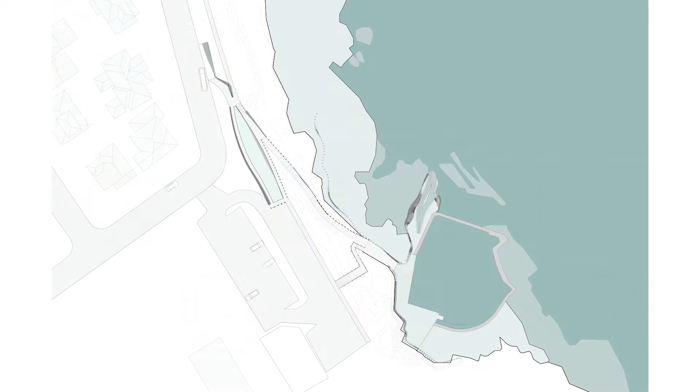To make these ocean pool experiences more accessible to the visually impaired, we empower the user from their arrival at the site by providing them with knowledge about the topography. Through a synthesis of experiences, coastal geomorphology, and history, we aim to provide universally accessible means of enjoying the ocean pool environment. Visitors to Malabar Ocean Pool will typically arrive by bus or with assistance by car.

Arrival areas are designed in universally accessible means to impart knowledge of the overall site conditions to assist in navigation. This is achieved through spatial maps which describe the site in a tactile manner. Designated experience zones are also demarcated on the spatial maps to allow the user to choose their own experience. These provide the user with ocean pool experiences with a varying degree of curation and environmental control.

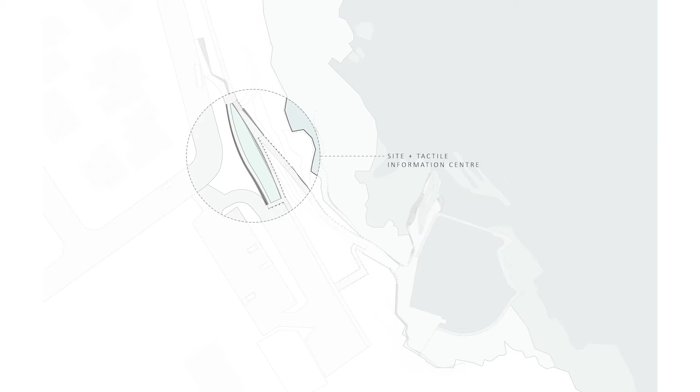For an in-depth understanding of the site, a tactile information center is recessed into the landscape, which provides a series of tactile data about the site. From a user perspective, tactile plates can begin to describe specific rock formations and reveal information of the tactile experiences through simulated examples of what can be expected at a particular site.

As the user begins the journey down to the ocean pools, opportunities are made to pause and observe the surrounding landscape. Spatial maps provide clues about the immersive sensory surroundings, including where to listen for the waves and where breaks in vegetation provide a refreshing ocean breeze.

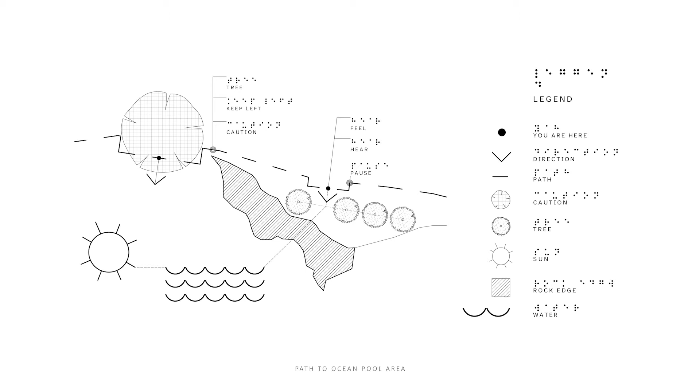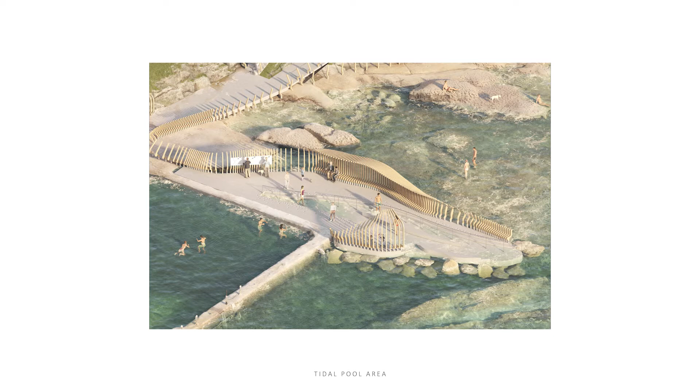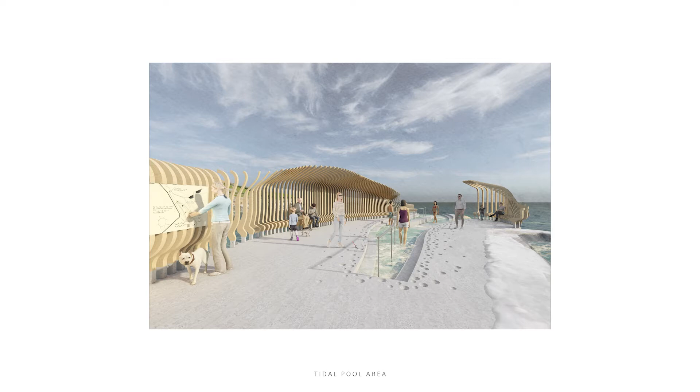To provide a universally accessible ocean pool experience, the Lost Plateau has been reclaimed to provide a curated experiential procession. The Lost Plateau enables safe testing grounds for experiencing the ocean pool environment and is embedded with layers of natural geology, including the erosion pattern language, which describes feelings of anticipation and danger underfoot. The plateau also provides a real water underfoot experience where users can interact with the ocean, tidal changes, and the marine ecosystem, a typically inaccessible environment.

Specially designed tactile maps are integrated with a wayfinding strategy to provide localized navigational information at each experience zone. Localized information is important for the visually impaired as it allows such knowledge to be front of mind.

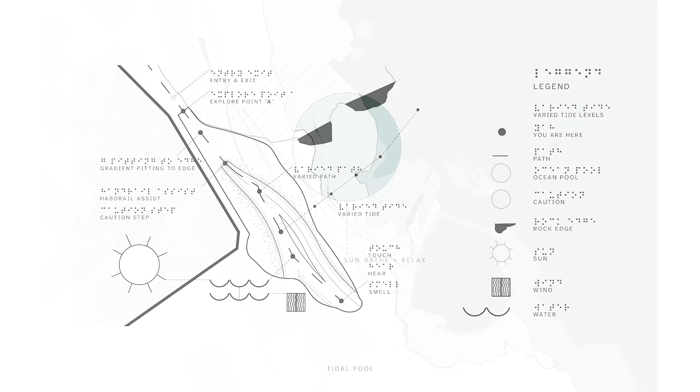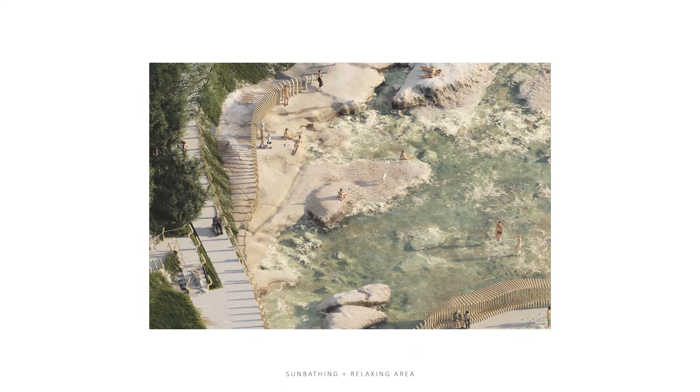One of the most common experiences at Malabar is simply to relax and sunbathe on the rock plateau. To enable users to enjoy this experience, a safe and curated path is provided along this rock plateau, where people often traverse to relax and sunbathe. The erosion patterns learned through experience at the Lost Plateau provide a sense of cognition of ocean pool formations.

Provided the user has developed a level of confidence, they may choose to adventure away from the curated path to explore. An understanding of the pattern language provided, alongside the use of other senses such as sound, will allow users to be guided back towards a sense of security of the cliff face where the provided path lays. Spatial maps here provide additional layers of information such as tide levels to assist the vision impaired with safe areas of traverse and clues about the time of day.

A key focal point and the most commonly used area on site is the ocean pool. Adjacent to the pool, an exploration area provides an opportunity to utilize the experiences gained at the Lost Plateau and traverse the natural rock surfaces. This area is naturally protected from the crashing ocean waves and provides a tranquil area of exploration and interaction with the water and ocean pool ecosystem. The spatial map indicates access to an ocean swim by providing information on reaching the pool as well as a curated journey through the exploration area beyond.

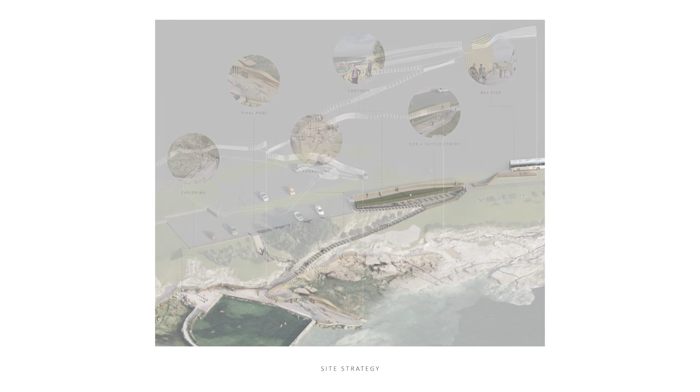So how do the users arrive at each of these experience locations? To arrive at each of these experience points, a family of hybrid timber profiles have been developed into a network of wayfinding devices to enable navigation across the site. Each family of profiles provides a certain degree of information to the vision impaired to aid in navigation. The network of profiles has been formulated as a ternary system of parts that easily allow the adaptation of the morphing profiles into a three-stage construction sequence.

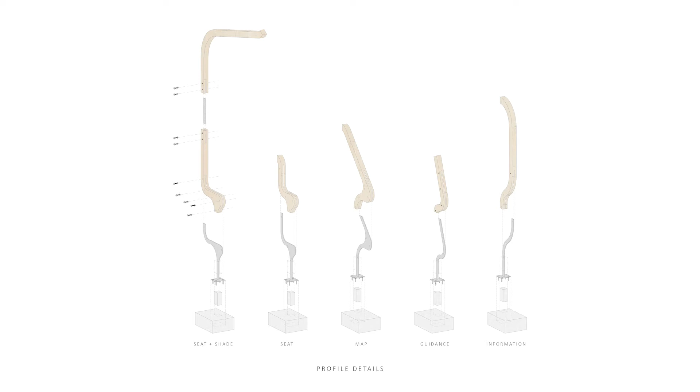These profiles have been formulated from a suite of 5 primary shapes which were designed with a human-centric approach and a particular focus on how the visually impaired will interact with the profiles. The plinth and profile base are concrete for weather protection and are uniform across the site, while the connection plate has been struck at a datum line for continuity. The timber profiles are then bolted on to form a relative response to the unique morphology and experience zone.

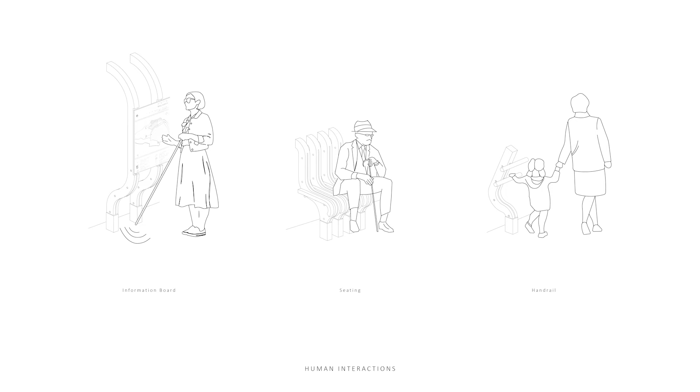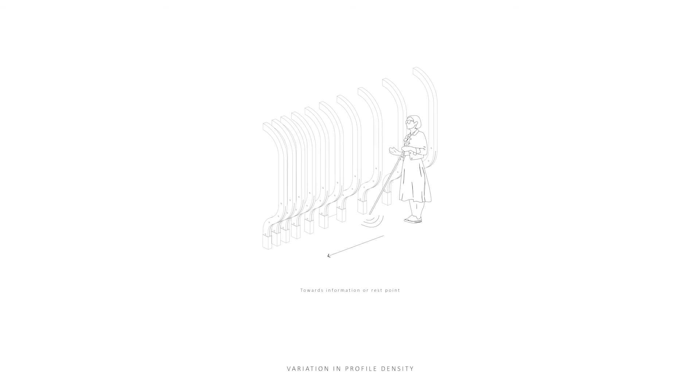Small additions to these profiles have been carefully constructed at certain points along the way to align these profiles with the uses that they are intended for. These details become the connection between the profiles and the users. Visually impaired users are also able to interact with the base of the profiles with their cane for audible, rhythmic feedback about their location and proximity to navigational tools.

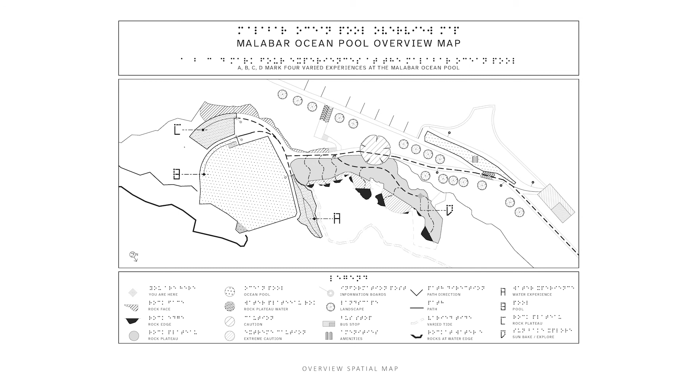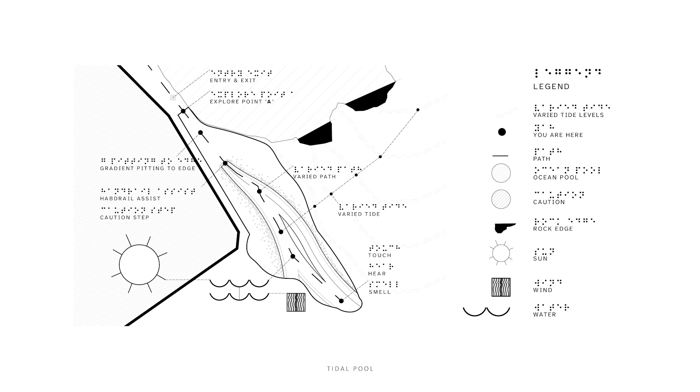The tactile maps are integrated into the family of profiles to provide specific information within a logical sequence. Firstly, the overview map placed at key points of entry provides a general outline and directional knowledge of places and experiences ahead. The localized spatial maps along the way provide more detailed experiential accounts of what to expect and provide information on immediate decisions to make. They have been formulated to inform experiences through the senses in a safe way and curated to be sight sensitive for the low vision and blind.

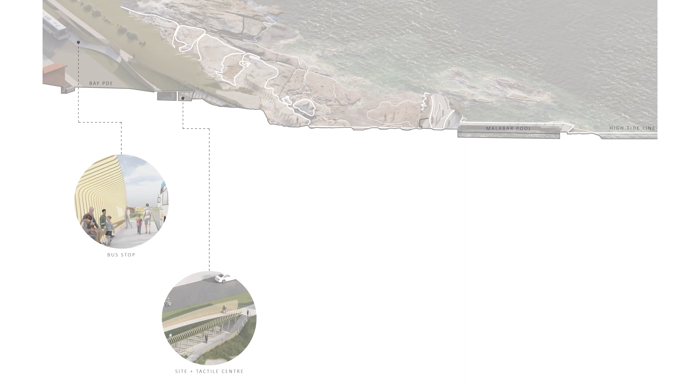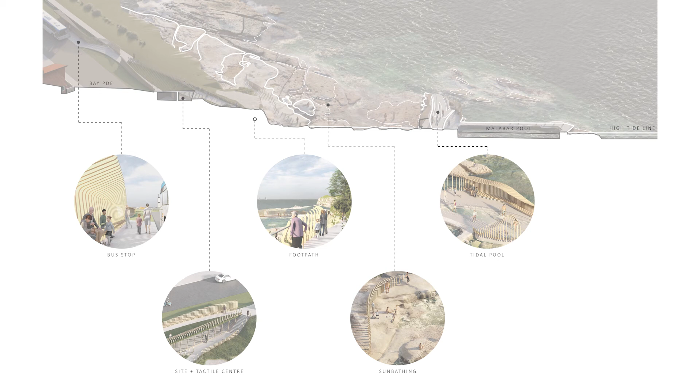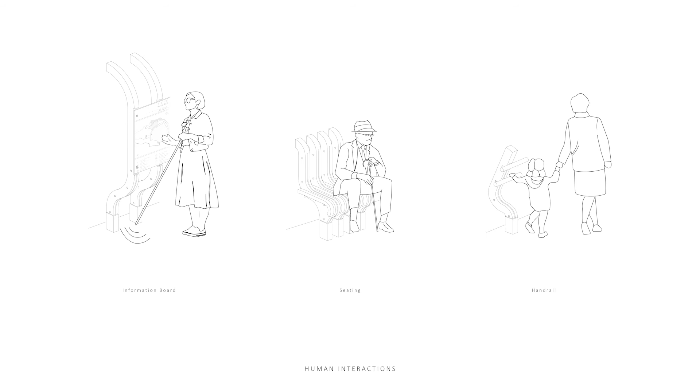Today, we have explored how ocean pool experiences are made more universally accessible through tactile and sensory interactions, achieving our sustainable development goals. This is achieved through a considered and controlled environment that is enhanced through the user's ability to choreograph their own experiences within the ocean pool environment. The network of timber wayfinding profiles has been designed in a user-centric approach which links the ocean pool experiences across the site into a continuous strand.

These profiles are embedded with tactile spatial maps at experience points, which make use of a site-specific language to forge a safe and confident means of navigating across the site. A combination of these principles creates a unique ocean pool experience that enables the user to feel confident while navigating an immersive environment that is typically inaccessible. Welcome to Malabar.